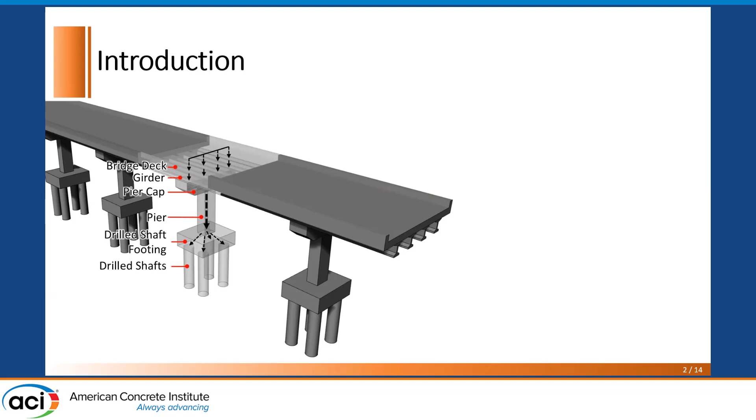And the configuration of the strut-and-tie model for the drilled shaft footing is determined by the internal force flow of the drilled shaft footing. And it becomes complicated when uniaxial flexure is applied through the column with the axial compression. So when the axial force is combined with uniaxial flexure, the strut-and-tie model configuration looks like this figure. And this model contains vertical column tie elements, and all the tie elements in the model should be fully anchored to the nodes to ensure full yield strength of the tie elements.

And current provisions employ the extended nodal zone concept to define a critical section for the development of the tie elements. But this approach is only applicable to singular nodes where the nodal geometry can be clearly defined. However, the vertical tie elements in the upper right figure are connected with smeared nodes where the nodal geometry cannot be clearly defined. So there exist no clearly defined design recommendations for the anchorage checks for those tie elements today.

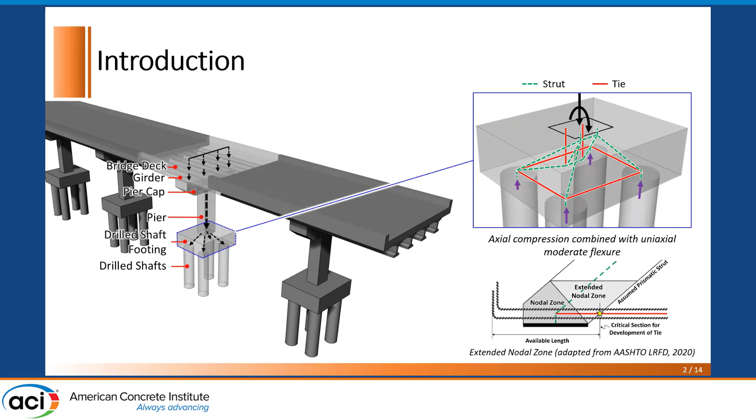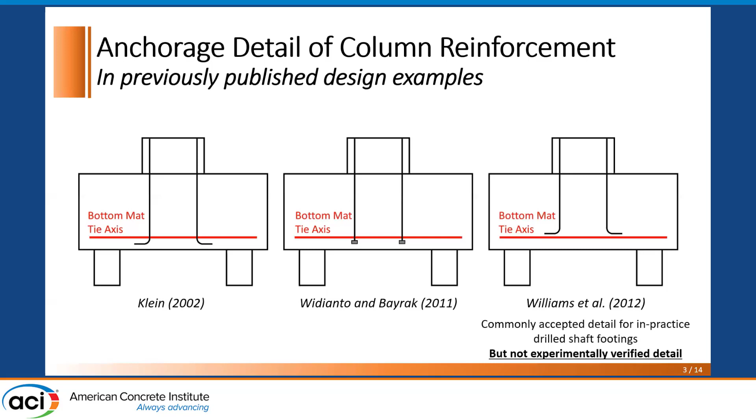And previous researchers proposed some column reinforcement anchorages in drilled shaft footings designed with the strut-and-tie method. Among the proposals, Williams and others propose using 90-degree hooks with hooks oriented outward to the column and extended down to the upper layer of the bottom mat reinforcement. This reinforcement detail is proposed based on successful previous footings in practice, but all of these recommendations were not experimentally verified.

Therefore, this study aimed to investigate the anchorage response of the column reinforcement through large-scale testing, and a total of four drilled shaft footing test specimens were designed and fabricated with 4 different anchorage details of the column reinforcement: straight, headed, and 2 hooked bars with hook orientations in opposite directions.

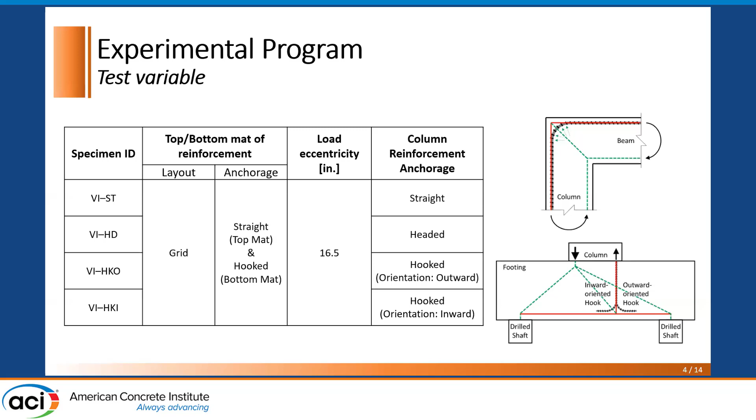And as I mentioned earlier, typically in practice drilled shaft footings use 90-degree hooks oriented outward to the column, but the orientation of the hook has been considered to play an essential role in its bearing action in structural elements such as beam-column joints, as shown in the upper right figure. If the hook orientation has to be considered by the internal force flow of the drilled shaft footing, the hooks of the column reinforcement should also be oriented inward to the column. So this study aimed to investigate it experimentally by comparing the test results of the 2 hooked column reinforcement specimens.

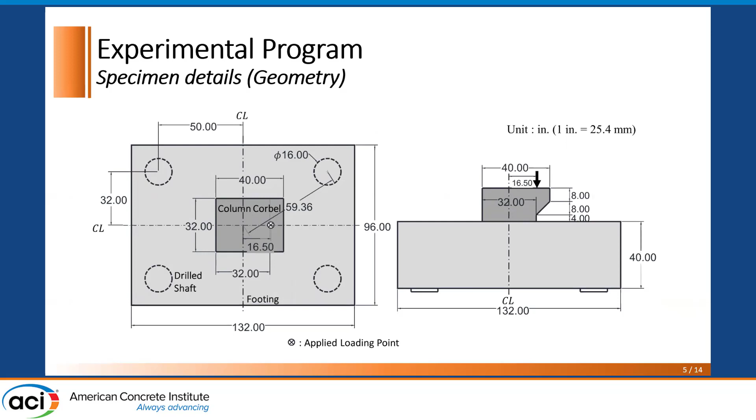And here's the test specimen dimension. Its dimension is about half scale of the real-size footing. The test specimen includes the bottom mat, top mat, and side face reinforcement to replicate the reinforcement detail of the real-size footing. And 4 number 7 column reinforcing bars are used, and a conservative amount of bottom mat reinforcement was provided for the specimen to be governed by column reinforcement yielding.

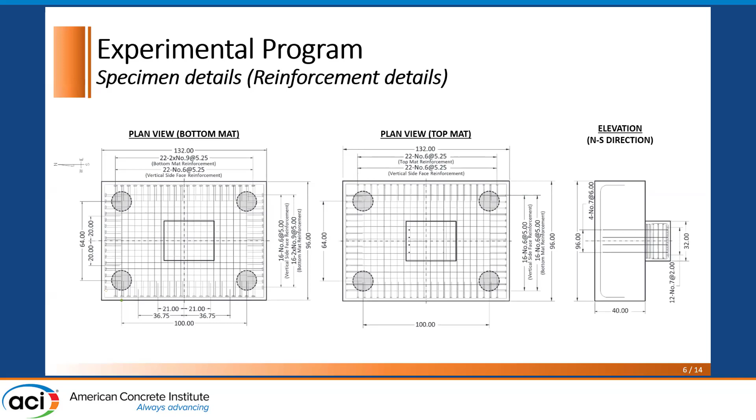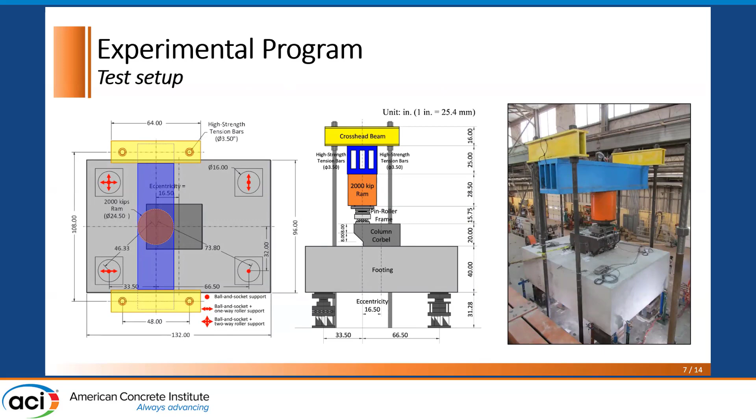And here's the test setup, and an eccentric loading is applied through the column to simulate the axial compression combined with the uniaxial flexural loading condition. And lateral restraint among the 4 supports can provide stability to the specimen and allow the specimen lateral expansion.

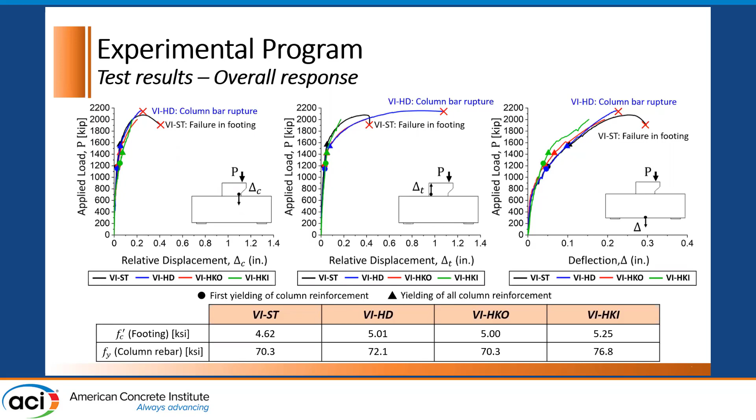And also the research team dissected the test specimens orthogonally at the plane of the column reinforcement to investigate the inner force flow of the drilled shaft footing. And we identified three different types of cracking in the drilled footing. The first one, type 1, is observed near the top surface of the footing, and it's conical cracking from near the top surface because of the high strain level near the interface.

And the second type, type 2, formed in the middle portion of the embedment length of the column reinforcement and is caused by the strut AC shown in the right upper figure. And the last one, the cracking coming from the compression side of the column core to the bottom end of the column, looks to be induced by the strut AB in the right above figure.

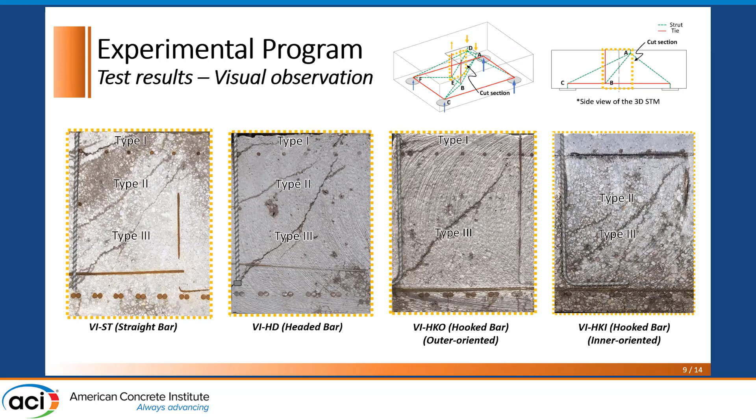In the straight bar and headed bar specimens, all three types of cracking can be observed, but for the outer-oriented hook bar, the second type of cracking is not observed, and the third type cracking is going underneath the bend radius of the hook. And in the inner-oriented hook bar cross section, we can observe the second type and third type cracking, but we cannot observe the first cracking induced by the high strain value near the interface of the column reinforcement.

Also, the column reinforcement was instrumented with a series of strain gauges to plot the stress profiles of the column reinforcement. When we compare the stress profiles, we can identify that except for the outer-oriented hook bar specimen, the other specimens can develop a relatively high stress level near the bottom end of the column reinforcement. But the outer-oriented hook bar, instead of the high stress level near the bottom end, experienced a relatively high stress level near the footing to column interface.

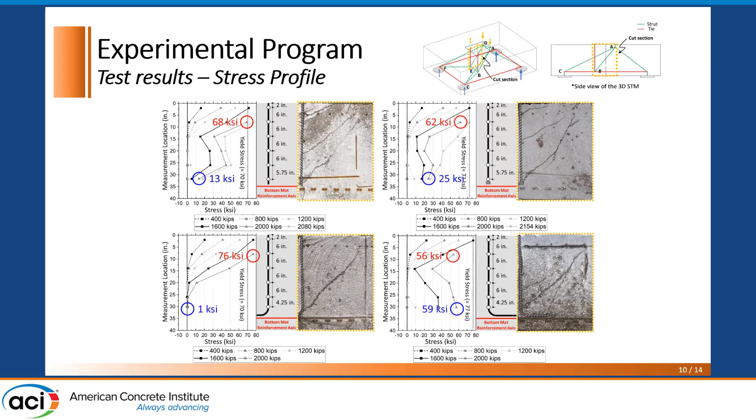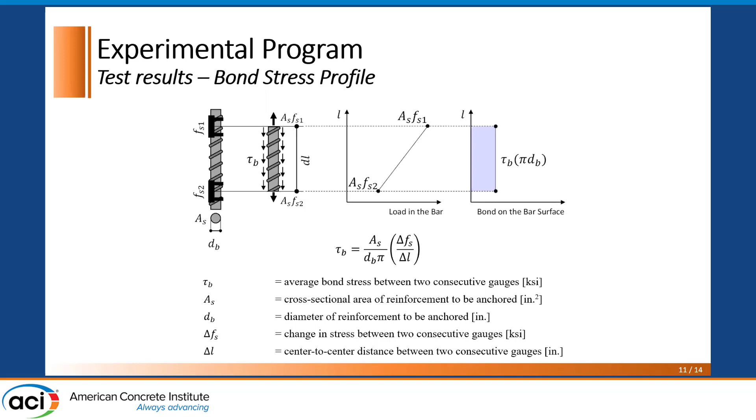The research team also developed average bond stress profiles based on the stress profiles I presented earlier, and based on the stress values obtained from two consecutive strain gauges, we can compute the average bond stress acting on the bar surface between two consecutive strain gauges based on this equation. And we also compare the estimated value to the analytical value specified in the fib Model Code.

And as you see, the straight bar can resist the tension in the bar based on bond stress only, and we can see the high bond stress level near the bottom end of the column reinforcement. This high bond stress is induced by the confining force from the diagonal strut in the right upper figure of the strut-and-tie model.

However, for the headed bar and hook bar, we cannot see a very high bond stress level near the bottom end of the column reinforcement, and it indicates that the tension in the bar near the bottom end is resisted by the bearing action of the head and hook. However, the outer-oriented hook bar cannot activate its bearing action, so it resisted the tension in the bar solely based on bond stress. So we can see the bond stress distribution of the outer-oriented bar is going down compared to the other anchorage types of the column reinforcement.

So from the testing results, the research team could identify that all the column reinforcement anchorages could yield, but we can confirm that they behave with different anchorage responses. And the research team could identify that the diagonal strut flowing down to the drilled shaft and the bottom end of the column reinforcement induces a high stress level at the bottom end of the column reinforcement. And this stress profile can be used to propose the critical section for the anchorage check for the column tie element in the three-dimensional strut-and-tie model in the future.

And the proposal and the testing results are going to be published through an ACI journal paper within a few months. So I think others can share the results when the paper is published.